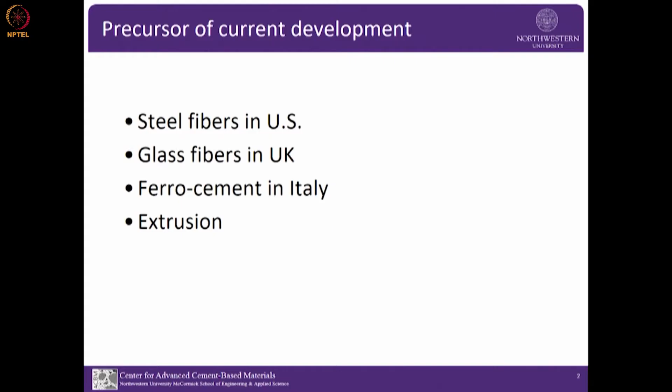Then ferrocement in Italy by the well-known architect and engineer Pier Luigi Nervi, which is a precursor of currently textile reinforcement, and extrusion, which can be considered a precursor for 3D printing.

Let me first start with the development of steel fibers in the US. The concept behind the development, according to Romualdi and Batson at Carnegie Mellon, is that concrete is a brittle material, and a brittle material obeys the Griffith fracture criteria, that is fracture strength is inversely proportional to flaw size. Smaller the flaw size, considerably higher fracture strength. So they said that if you use randomly distributed fibers, they can be closely spaced, so you can increase the tensile strength. A very intriguing idea.

When they published their paper, I was doing my PhD at Cornell, and I got quite interested because I had taken courses in fracture mechanics at Lehigh University. I looked at the paper, and it turns out to prove their concept, they tested reinforced concrete beams with wires, and they were under-reinforced, so as soon as the crack happened, the bar yielded. To get the same volume but closer spacing, they had to use thinner and thinner, smaller diameter wire. And smaller the diameter of the wire, higher the yield strength. So when I normalized the results with the yield strength, it turns out there was no effect of spacing.

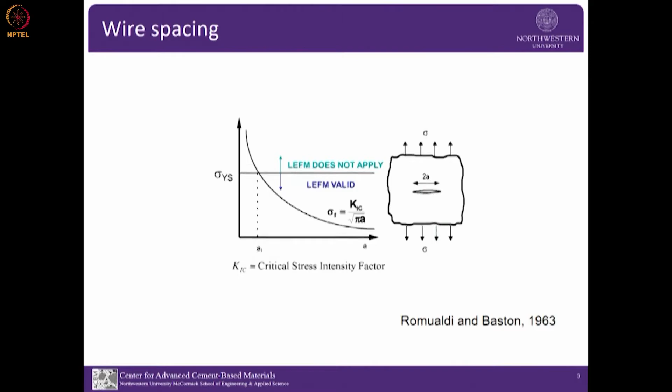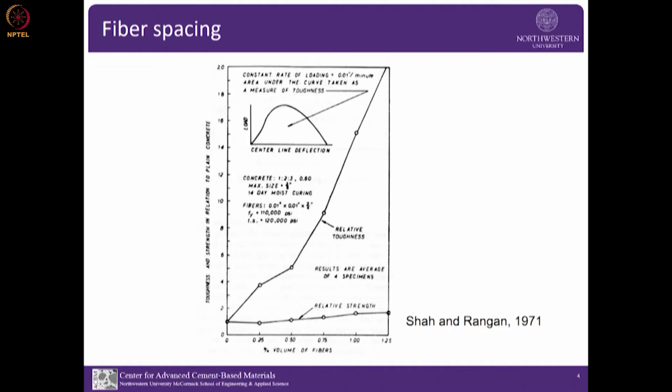Then we did some work with randomly distributed steel fibers. Here you can see percentage of fibers - more volume of fibers means they are more closely spaced - versus tensile strength, and what we call toughness, the area under the load deflection curve. This was work I did with Vijay Rangan, who is now retired from Perth. You look at it and see there is really no increase in tensile strength, but there is a substantial increase in toughness.

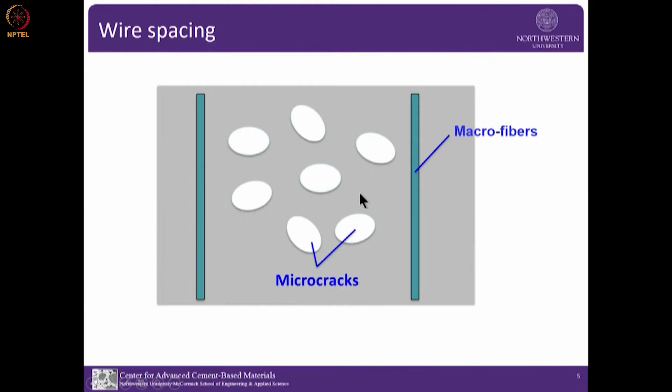Why is that? One reason there is no effect of spacing is that at the meso scale, the cracks start at the micro level. These fibers are macro fibers in the millimeter range, and we're talking about 1% or so. Before the fibers can interact with the crack, micro cracks have already coalesced into a macro crack, so tensile strength is already formed. Then the fibers constrain crack opening or crack width, and toughness. That is really the basic idea about currently used fiber reinforced concrete.

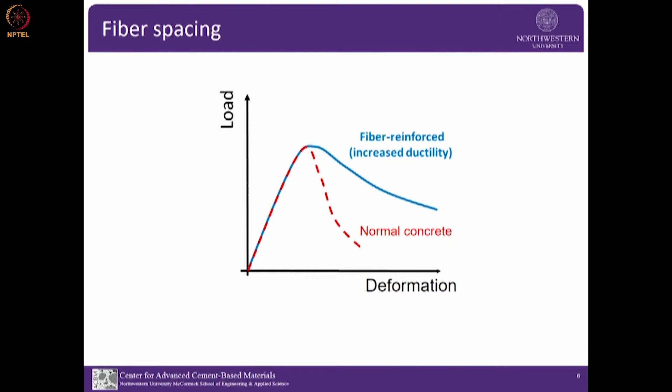If you look at fiber reinforced concrete, whether in tension or compression, load versus deformation, we know normal concrete in compression or tension is characterized by strain softening, very important especially in compression, and in tension. When we have fibers, at around one percent, it doesn't change the modulus, and generally does not change tensile strength, but it does change substantially the post-peak behavior. So crack control is the main reason we now use macro fibers, conventional fiber reinforced concrete.

The toughness becomes important, so how to measure fracture toughness? For linearly elastic fracture mechanics, there are ASTM tests. You have a notched beam, apply the flexural load, and when it reaches maximum, everything is elastic. From the peak load and crack depth, you can calculate fracture toughness. But a lot of work has been done, and it turns out concrete is not quite brittle, we call it quasi-brittle, so there's crack propagation before the peak - a so-called fracture process zone. So you cannot use LEFM.

A lot of work has been done, I think Professor Gettu has also been involved. Now people conclude the best way to get fracture toughness experimentally is with this notched beam test, testing crack mouth opening displacement. When you apply the load with a CMOD control rate, you get the entire load displacement curve, and from there you can calculate fracture toughness. This is really an accepted way - Italians have a code based on this test.

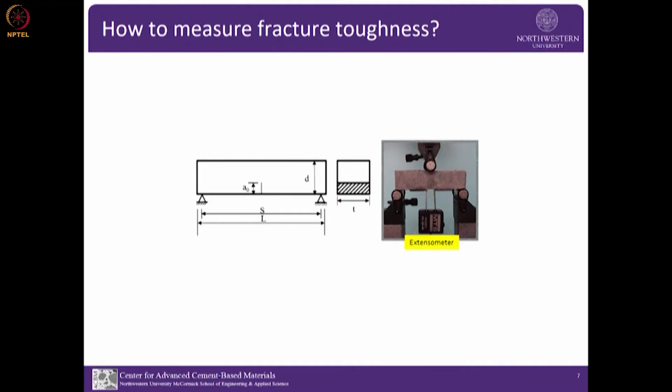Not too many people can have closed loop testing. I know IIT Madras has it, but many people don't. So you need a method which is somewhat easier to conduct than the CMOD control. So we developed this so-called ring test.

In a ring test, you have a concrete here, and there is a steel ring which is relatively rigid. After curing, you put concrete into drying. Concrete wants to shrink, steel says no, so you develop tensile stress. And because of axisymmetry, it's like an infinitely long tensile specimen. So you find out when the crack starts, and then using a microscope how wide the cracks are.

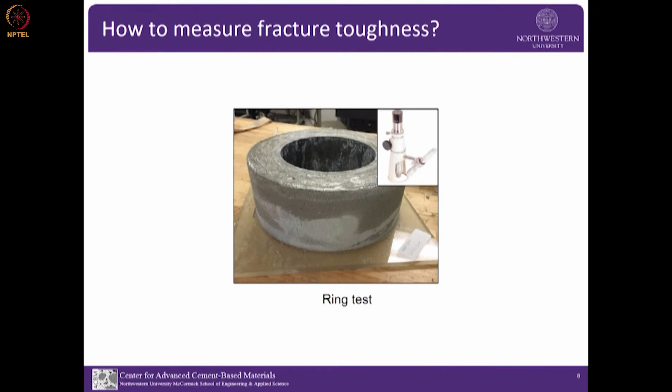This test has now been standardized by both ASTM as well as highway departments in the US. It's a good way to evaluate the crack potential of a material, and to evaluate different types of fibers. For example, we showed that when you make a high strength concrete and compare it with normal strength, high strength has a higher tensile strength, but because it's more brittle, it cracks earlier than normal concrete. So this is a very good test.

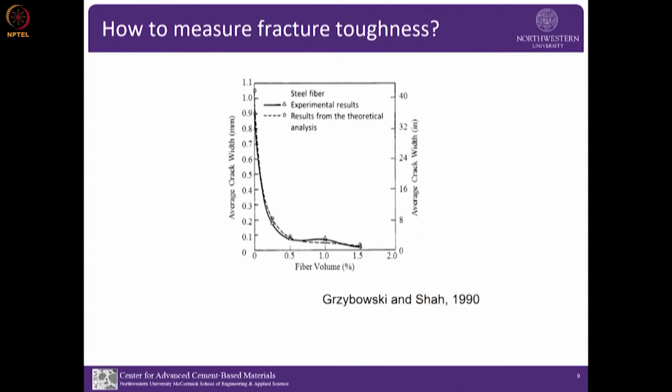Now, when you cast concrete, those of you who have done experiments know that if you increase the volume of fiber, workability is an issue. If you increase the length of fibers, workability is an issue. So this is one of the reasons why with cast concrete, most applications of fiber reinforced concrete use about 1% fiber volume, and aspect ratio not too much larger than 100.

So people are looking at alternate methods of production other than cast in place. One of them is the so-called Hatschek process, which was developed in Austria, and it's widely used for cement board. Cement board starts as a very dilute slurry originally with asbestos fiber, and then layer by layer it's deposited. This is in fact the first example of so-called additive manufacturing, because you have layer by layer manufacturing and you get cement board.

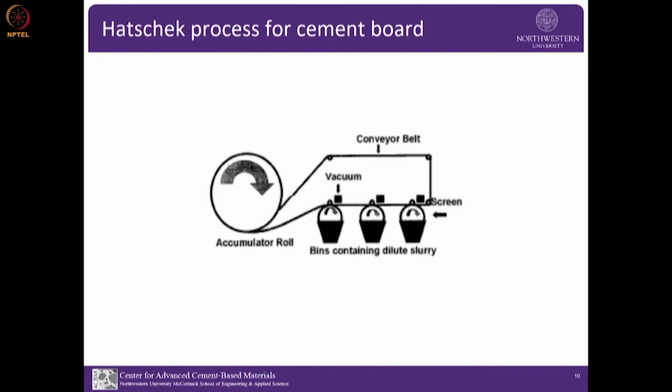It turns out that asbestos could cause lung cancer, called asbestosis. So many countries have banned it, and people have been looking for alternatives. In England, they came up with the alternative of glass fibers instead of asbestos fibers. The pioneering work was done by Majumdar at the Building Research Establishment in England.

Now, when we use normal glass, there are issues with the alkali reaction of E-glass. So they developed alkali resistant glass fibers by adding zirconia. It turns out that in these applications, glass fiber really did not work with this processing. So now for the Hatschek process, people are using cellulose fibers instead of asbestos for green strength, and then for reinforcing either PVA or polypropylene.

But chopped glass fiber spraying, simultaneously spraying with a slurry of cement and glass fiber, has become quite popular, and it's called GFRC, glass fiber reinforced concrete. Let me show you some work we did with GFRC.

When the alkali resistant glass fiber was developed, to test that it doesn't corrode in high pH, they do a test with a glass strand surrounded by high calcium hydroxide solution, and then measure it to see whether the tensile strength holds with this accelerated test. It's called SIC, and they showed that alkali resistant glass fiber performs very well in this test.

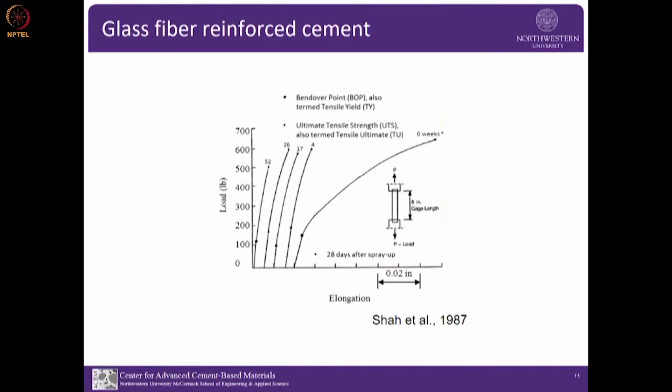I talked with one of you working on textile, and I mentioned that he must also test the composite to see whether you have durable results. It's different with a continuous fiber rather than chopped, because when the chopped fiber is inclined, they can break. So you might have a different mechanism with that.

So that's one way. There are two alternates then cast in place that I mentioned. One was the Hatschek process, and the second was GFRC, where you spray glass fiber and cement, and both would allow longer fibers and higher volume, so you can get this strain hardening response.

Well, third way is extrusion, and I talk about extrusion because it is a precursor to 3D printing. We developed this in 1997. So this is a screw type extrusion.

You have fiber reinforcement, material looks like a dough, and you push it through a die, depending upon the shape of the die. The fibers we used here are microfibers, PVA fibers, 14 micron in diameter, and rather short, 2 millimeter long. You can see that we got 2% and 4%.

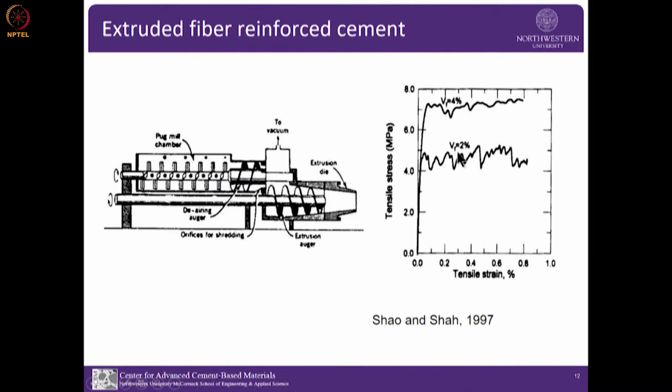We got a higher tensile strength because fibers can now interact with micro cracks. And if you design it right, you get a strain hardening response, because it's essentially like a ductile material. I often showed this to my class during that time.

Most, as I said, my macrofiber is still the most commonly used commercially, but people have been working with this so-called strain hardening cement composite.

Here is, for example, one of the things we did, which is a 10 megapascal strain hardening response.

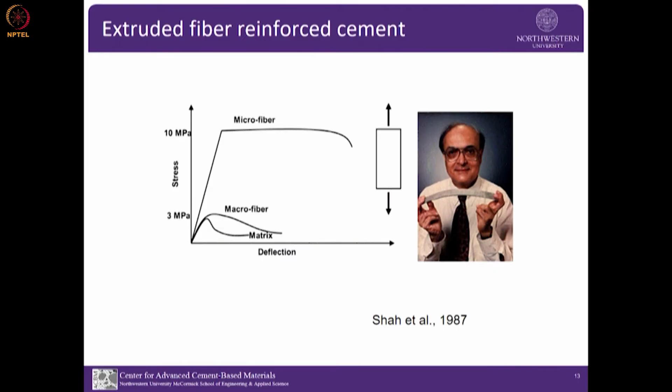Now, what we found out, if you recall, I told you that the effect of closer spacing did not work with the macro fiber, but with the small fibers we have now.

So what we did: all the material had the same volume of PVA fibers, but because of dispersion and other reasons, we got different results.

So we cut the specimen and, using SEM, calculated what is the fiber free area, and assumed the fiber free area is the flaw size.

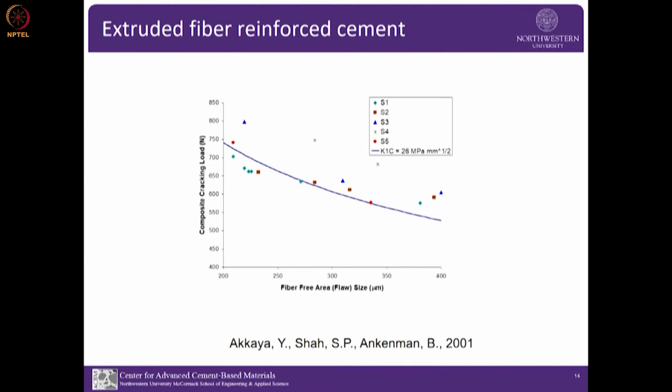So here we calculated the fracture composite versus fiber flaw size, and we did get something similar to the Griffith fracture criteria. But the flaw size has to be in a small enough range, and the fibers have to be in the size range that they can interact with the cracks.

With extruded cement, I showed you this: depending upon the die you can manufacture sheets, and as a matter of fact, so-called cement board with different fibers has been extruded in Japan.

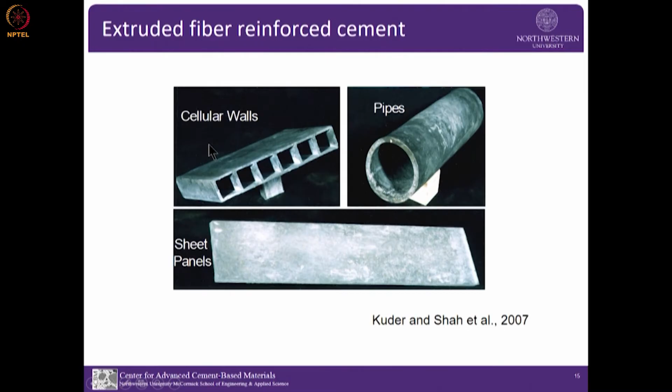You can even extrude pipes or cellular wall sections. To show you how light these can be, many of you might know Alva Peled.

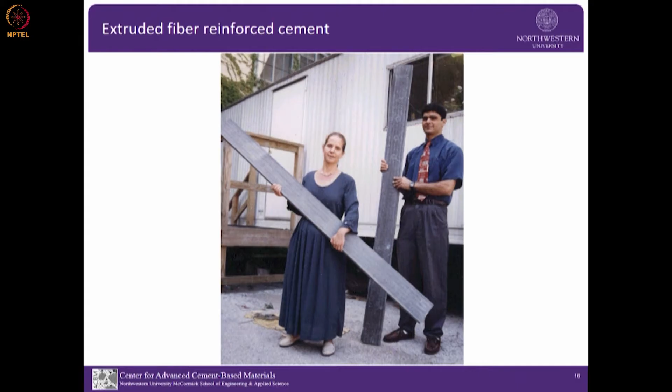She is a professor now in Israel, but she was a postdoc with me. This is almost a 2 meter tall cellular section, and it's light enough that Alva can lift it. And Ilmaz, who is now a professor in Istanbul.

So then there are other ways to manufacture, and Alva, and Barzin Mobasher at Arizona State, are using pultrusion. Now pultrusion is quite common for resin and epoxy type composites, but this is the first time with cement. You have a continuous strand that goes through the cement slurry, and then you develop the composite.

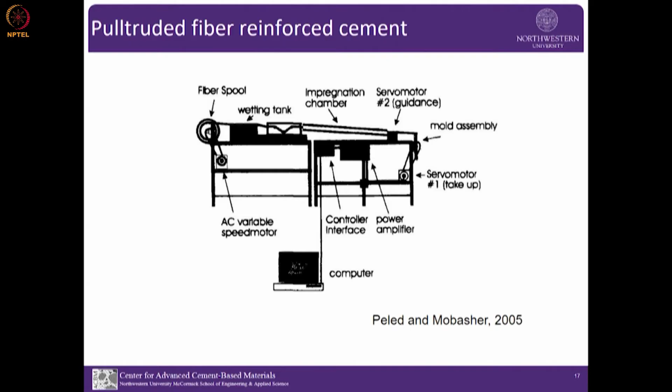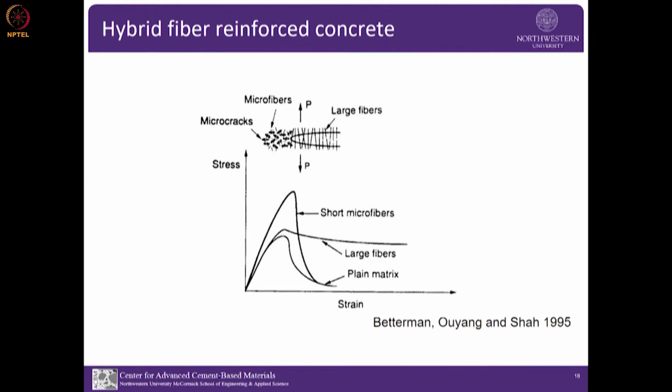Okay, so another thing people have studied quite a bit is the so-called hybrid composite. In the hybrid composite, we know that short fiber can increase the fracture strength, but they are short. So once the crack develops, they don't have as much long range crack controlling property. Large fiber can do it, but they don't really increase the tensile strength.

So you can combine the two and produce results which have a very, very fine crack width and also post-peak ductility. To show you an example of this, we did a test. These were mortar specimens reinforced with fibers and subjected to tension. So there will be cracks.

We wanted to see what the flow property is, because most of the time when you use fiber as a layer, you want it to be protective of rebar, so you want to make it as impermeable as possible. If you use big fibers, they will control cracks, but the cracks will be wider. Finer fibers give much finer cracks.

It also works with the mechanical properties. Here is the stress displacement of plain mortar, and here is 0.5% of steel macro fiber, which doesn't really change much except post peak. Now this is 0.5% of micro steel fibers - we asked Bekaert to make for us just the microfiber, about 30 microns in diameter.

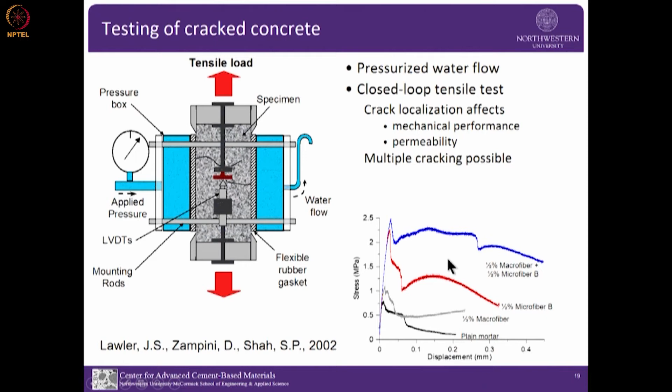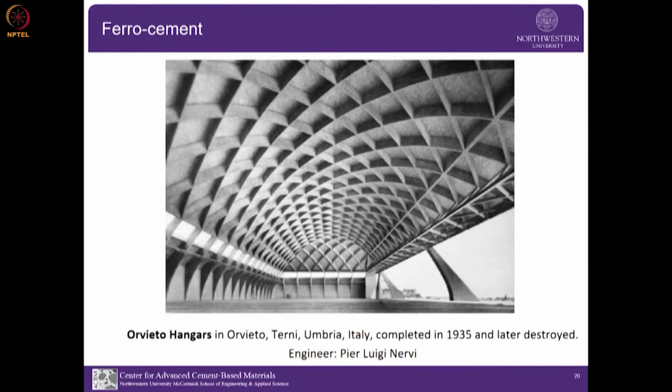Later on, I was a visiting professor at MIT, and Tony Naaman started his graduate work. I was in the materials group, and Tony wanted to do something with reinforced concrete. So we said, okay, let's look at ferrocement and give some engineering quantitative reason why cracks are so fine in ferrocement.

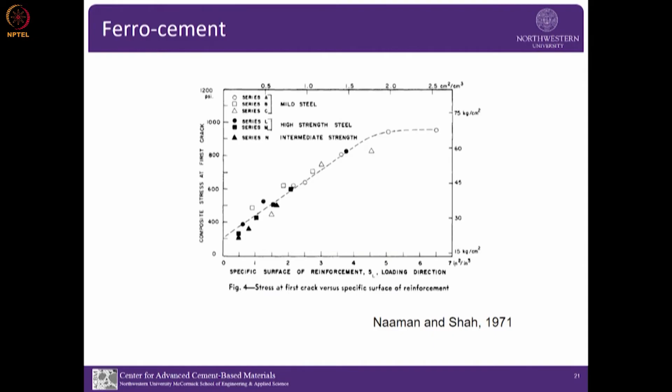This was a paper we published in '71, plotting composite stress versus surface area per unit volume - higher surface area means higher bond, and you get excellent increase in first crack strength, which is important, and you also decrease crack width. We showed average crack spacing versus specific surface of reinforcement - more surface area gives more multiple cracks for the same displacement, and obviously finer cracks. That is the basis of ferrocement.

Now, instead of steel wire, people have been using glass fiber cloth, synthetic fiber cloth, as well as carbon fiber. Quite a bit of work has been done in Germany with textile reinforced with glass fiber. The basic idea is that with textile you can have multiple cracking, strain hardening response, and bond becomes a key point.

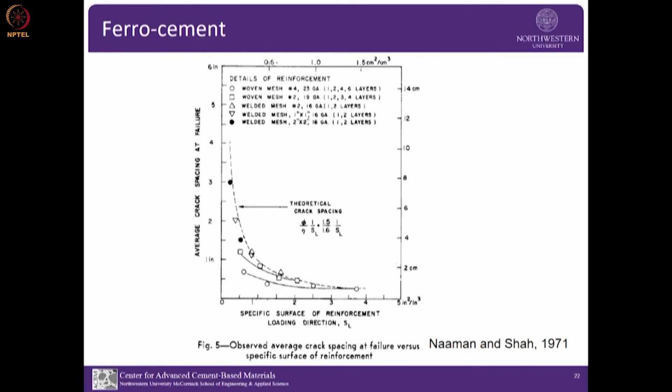Even now with textile, say with carbon fiber, bond is an issue. With glass fiber, bond can be an issue because of the coating. As I found out at a conference in Dresden, people have been working on how to improve the bond with surface area. One idea I mentioned was whether dipping the glass fiber cloth in a slurry of nanosilica would help improve the bond, since nanosilica might help, but with the coating I'm not sure - there are many ways to approach it.

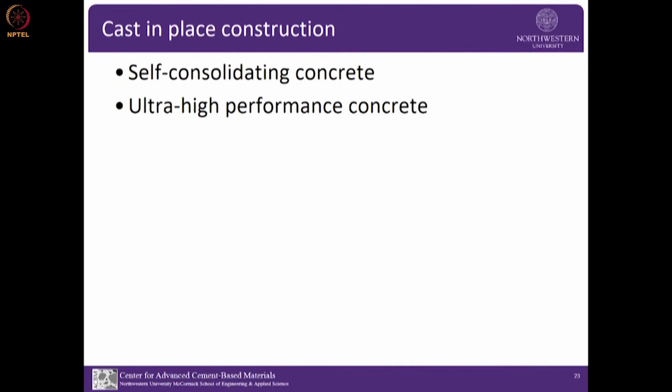With the development of self-consolidating concrete, we can use longer fibers and higher volume, because the material flows like water. This has changed previous thinking that we couldn't add more than 0.5% or 1%. Now we can add higher volumes of longer fibers, which has led to what we call ultra-high performance concrete. UHPC has no coarse aggregate, primarily silica sand, and compressive strength can be as high as 200 megapascals. In fact, ACI, the American Concrete Institute, defines UHPC as minimum 150 megapascals with sufficient ductility - this is very important, because ultra-high performance concrete would be very brittle, almost like glass, without fibers. So as a result of fiber reinforced concrete and HPFRCC development, we now have UHPC.

I just want to show some very recent work I was involved with at Hong Kong Polytechnic, where we used high density polyethylene fiber - higher modulus, longer length, and finer diameter. The interesting thing is that the strain here is 8%.

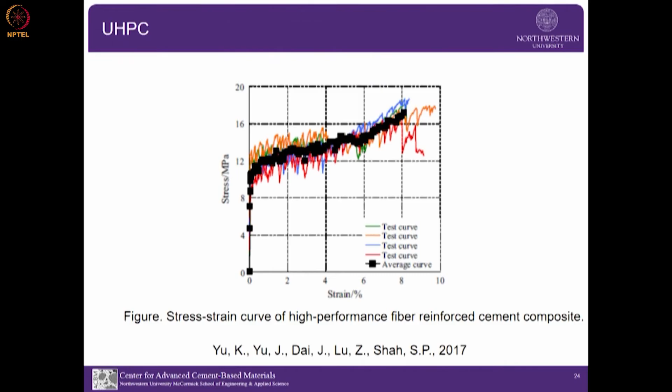You don't expect multiple cracking to have such a high peak tensile strength - as much as 16 megapascal. So because now we can control rheology, we can add fibers, these are 2% volume of the fibers, and I thought it would be interesting, so we put that in the paper.

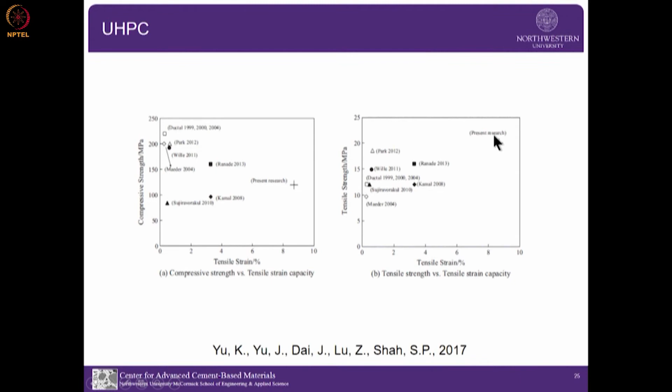Here I've shown UHPC compressive strength versus tensile strain, because we want high compressive strength and high ductility. In our work, we weren't able to obtain 150 but more like 120 megapascal, with considerably higher strain. Looking at tensile strength versus tensile strain in tension, this is considerably higher compared to what's been done before. So now with the development of rheology and fibers, we can produce strain hardening composites with relatively large strain and high compressive strength.

So this is where we are with microfibers and macrofibers. We have conventional fiber reinforced concrete, with a lot of work being done on what happens in cracked concrete over time under creep. And UHPC, very high strength concrete up to 200 megapascal with 3 to 4% fibers - for example, Lafarge has developed a product called Ductal, same idea, and UHPC is now being used in many applications.

But conventional reinforced concrete, with reinforcing bar or pre-stressing, helps structural ductility. After the crack forms, reinforcing takes over and we get substantially higher load and ductility. With fibers, the main emphasis is crack control, and with UHPC in some very thin, very high strength applications, you may not need conventional reinforcement.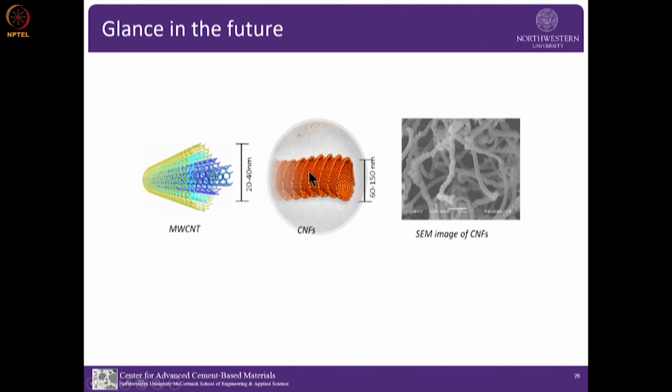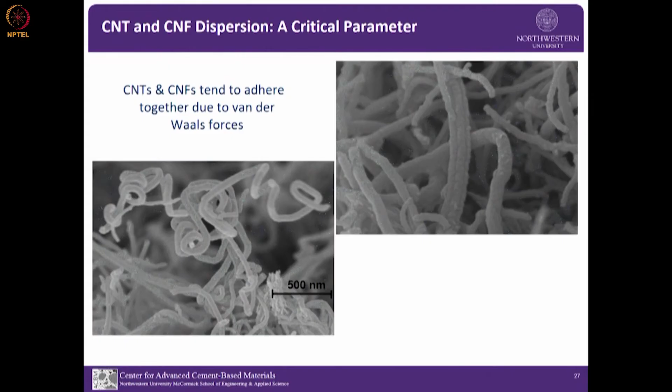So I want to show you some results of well dispersed carbon nanotube. We've also been using carbon nanofiber, which is somewhat coarser, and the way they're made, we think the bond could be somewhat better, though we haven't checked it. Here's an example of what happens if they're not well dispersed - the fibers conglomerate - versus well dispersed, where we have individual, in this case multi-wall, carbon nanotubes. This is SEM imaging, and there's really not a very good way to find dispersion of carbon nanotube in hardened material, because at nanoscale you don't see them well in SEM.

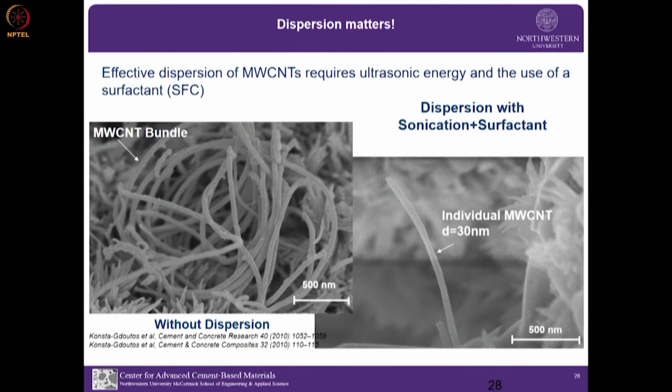In an aqueous solution you can check dispersion with UV spectroscopy. The idea with carbon nanotube reinforcement isn't like conventional reinforcement - you have an aqueous solution where, in the factory, you apply ultrasonication and surfactant, and then use that similar to a superplasticizer. So that's a different way of processing.

I want to show you some results with carbon nanotubes. These are fracture tests on mortar specimens with water to cement ratio 0.5, at 0.1% dosage. With carbon nanofiber, for example, we've substantially improved - almost doubled - the fracture strength, while also maintaining a very good post-peak response.

Now we know that carbon nanotube at 0.1% is well dispersed, and we say, why is it working so well at such a small amount? At that time we had our MIP, but Northwestern was saying we cannot use it because one of the students had spilled some mercury, so we couldn't measure it. So we said, what else, what property can be substantially different because of change in nanopore?

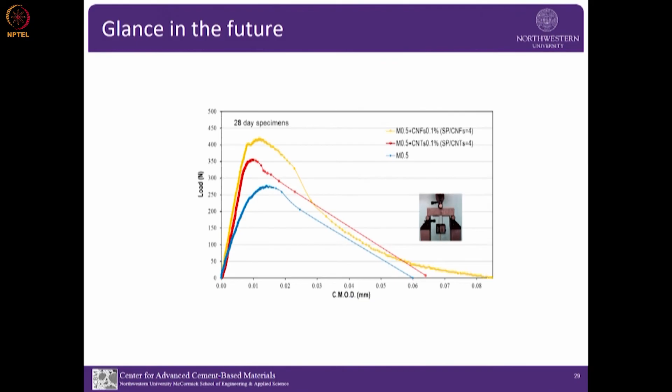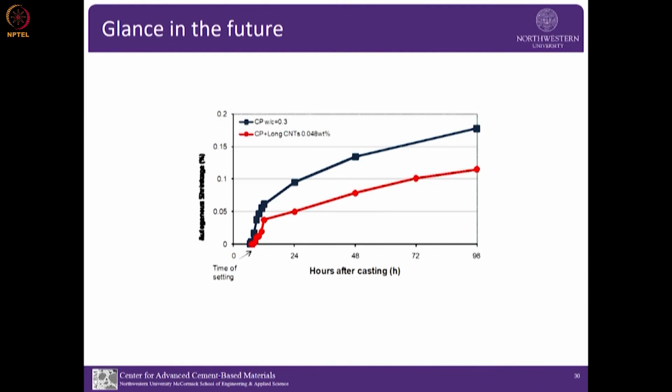So we measured autogenous shrinkage, and we found a substantial difference. This is water to cement ratio 0.3, measured after time of setting. This is the plain cement paste, and this is with a very small amount, 0.048%, showing substantial reduction in autogenous shrinkage. We are still trying to understand why this is so.

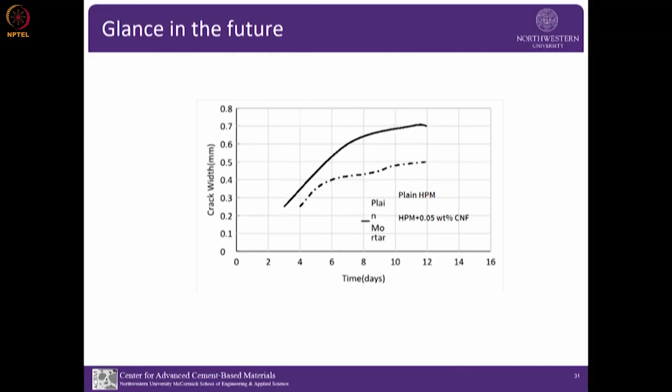Then we used this ring test and autogenous shrinkage, measured the shrinkage when the crack starts and how wide they are. This is the plain mortar, and this one with 0.05% carbon nanofiber. The crack starts later in the ring, and once it starts, it has a lower crack width. So this combines, in a way, the advantage of both fibers and shrinkage reducing admixture, because we have reduced shrinkage and reduced crack width.

Many people have been talking about so-called smart material. You take advantage of the piezoresistive property of adding carbon nanotube. Piezoresistive means you apply stress and the resistance changes proportionately and repeatably, like a sensor.

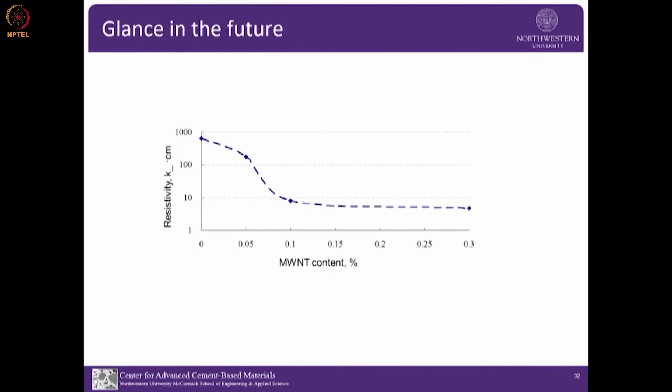So we did some work where we measure the resistivity. This work was done at Hohai University in Nanjing, with multi-wall carbon nanotube, looking at resistivity without any addition. You can see at 0.1% conductivity has changed by two orders of magnitude, and resistance has gone down. So that's very effective for using this material as a sensor.

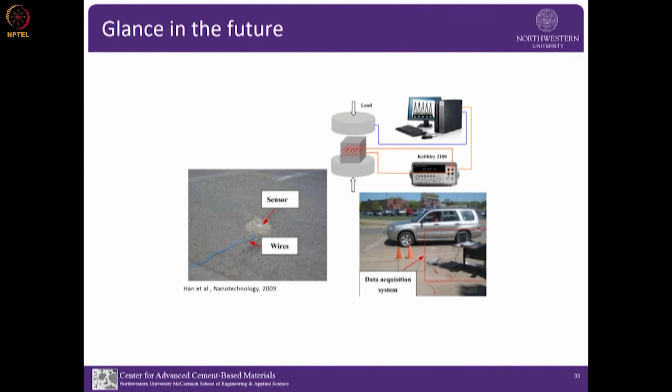Many people have done work on this. This is not our work, but somebody in a highway department in Minnesota used cement with 0.1% carbon nanotube, applied compressive load repeatedly, and remotely measured and calibrated the change in resistance. When you embed this as a sensor, when a car goes through, you see the change in resistance, and with a second car, you can measure, for example, the speed of the car remotely. There are many other ways people can use this as a sensor. So that's another property of carbon nanotube.

Then I want to conclude with some very interesting direction. Last year, about January, there's a big ready-mix company, I think called Prairie, which before was Material Service, and now it's one of the largest. They called a workshop, and they said that the tall building designers are asking them to double the modulus of concrete. We're talking about 55 gigapascal.

There were people from material suppliers, ready-mix, contractors, and they said currently, to satisfy the requirement of modulus, they are increasing compressive strength. Instead of, let's say, being happy with 100 for a tall building, they are using 140 just because of the modulus. And that's more cement, not sustainable, and also the material is more brittle.

After that, I realized that most of our work was on cement and carbon nanotube, because we are talking about nanoscale, but we had seen an increase in modulus. So we said, let's see whether we can increase it also - what is the increase when you have mortar, sand, and aggregate? Now you realize if you have aggregate, carbon nanotube is not doing anything to the aggregate, so the proportional increase in modulus would be less. Well, we did this.

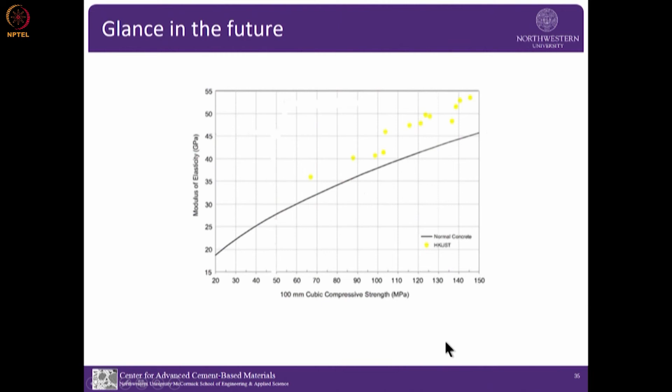You cannot model this with a composite material approach. Same thing more or less with concrete, and I will show you why. So we thought this is quite interesting.

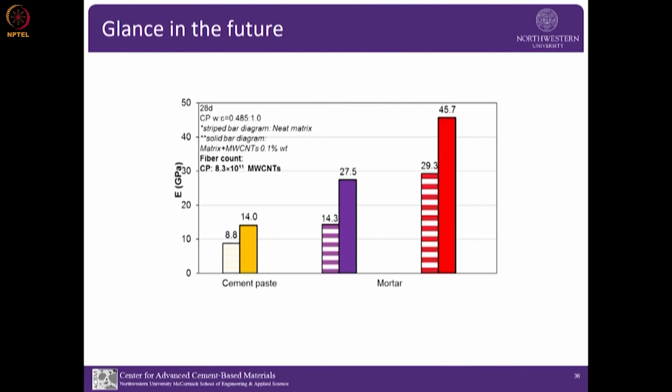Recently we published this in Concrete International - uncoupling modulus from compressive strength. So the designers seem to be quite interested in this, and we will see.

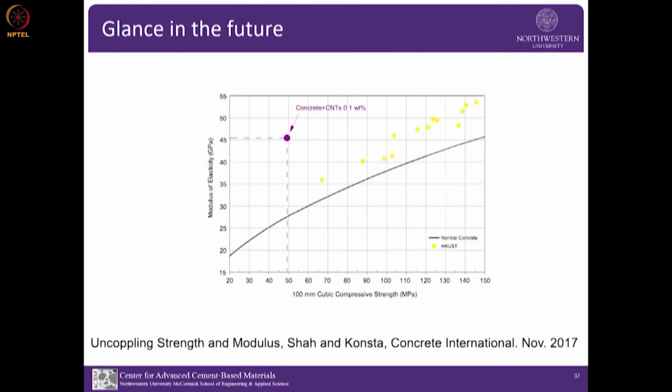Of course, the challenge is we have only done this in the lab, and to do it for concrete at large scale - even though it's only 0.1% - you need a larger facility to ultrasonicate, so scaling up is always a big problem. We will see how it goes, but I thought this is very interesting.

So now, why does a small amount of carbon nanotube increase the modulus? First let's look at cement paste. For cement paste, we did nano indentation - some of you are familiar with it. You measure at the nano scale using indentation, and from load deflection, unloading and loading, and using contact mechanics, you calculate the modulus of the nanophase.

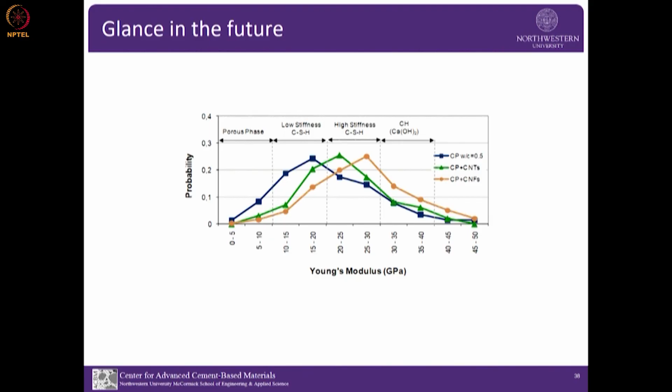This is essentially the modulus of CSH. This is cement paste with water to cement ratio 0.5, and this is cement paste with carbon nanofiber. You can see that we have moved the CSH modulus to the right - carbon nanotube has improved the stiffness of calcium silicate hydrate. This is one of the reasons why, even with a small amount, 0.1% of carbon nanotube, you see the increase in the modulus of the composite.

To see what is happening with the aggregate, we decided to measure the modulus at the nanoscale of the interface. Now, the interface is 10 to 15 micron, so you cannot use conventional nano indentation because the indent itself is a few microns. So we use an atomic force microscopy needle applied in cyclic loading - you measure resonance frequency, dynamic frequency, and the force is very small, and the spacing is much smaller than with conventional methods.

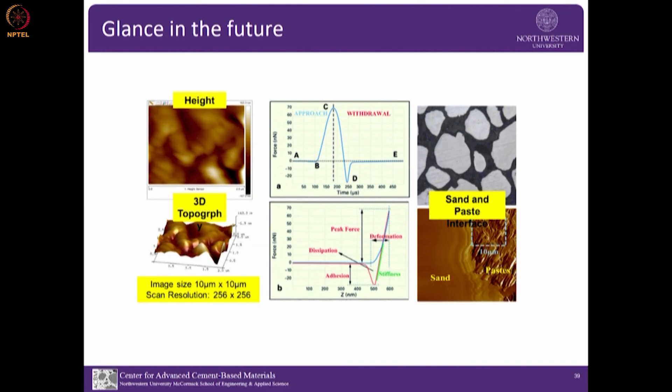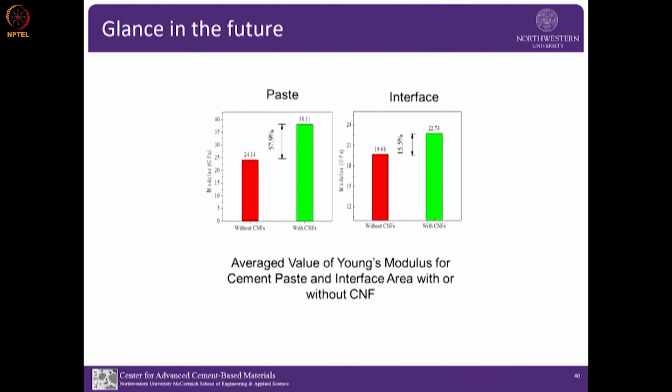So doing this, I want to show some average values - of course there is a histogram. This is the average increase with addition of carbon nanofiber of cement paste and interface. One reason mortar and concrete were proportionately more effective is that the interface modulus increases - you not only increase the paste but also the interface. But we have to realize that silica fume also densifies the interface; however, silica fume increases compressive strength and makes the material more brittle. Here we don't really increase compressive strength much, and as I showed you before, the material is not more brittle.

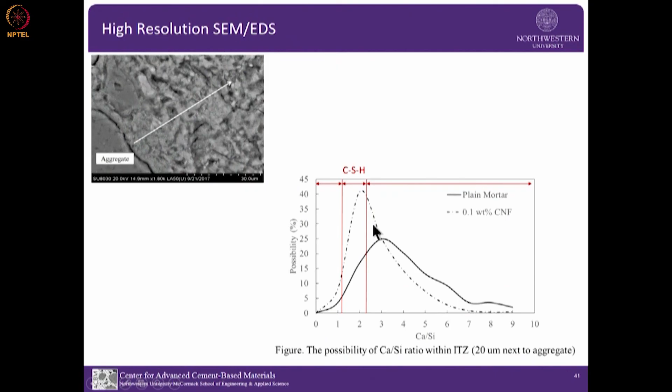Another interesting thing we found - this is work done by Yuan Gao, the current PhD student - using SEM and EDS, she took several lines and measured the calcium to silica ratio. These are average results, and what we found is that at the interface, the calcium to silica ratio is lower when we have carbon nanofiber. We know the lower the calcium to silica ratio, the higher the modulus of CSH. I don't quite understand it - I presented this at one of the conferences when Karen was there, and she said she thinks the carbon nanotube may influence the crystallization of CSH. That may be the reason, but we don't know, we are just looking.

It's very interesting that carbon nanotube also changes the morphology of calcium silicate hydrate. So that's really modification at the nanoscale - that's a good direction to pursue.

So just to summarize, what do we want in high performance fiber reinforced concrete? Well, I think we want enhanced modulus of elasticity - clearly that's very useful in tall building design. We want what I call a higher bend-over point, that is a higher elastic limit, so we want noticeable cracking to start as late as possible.

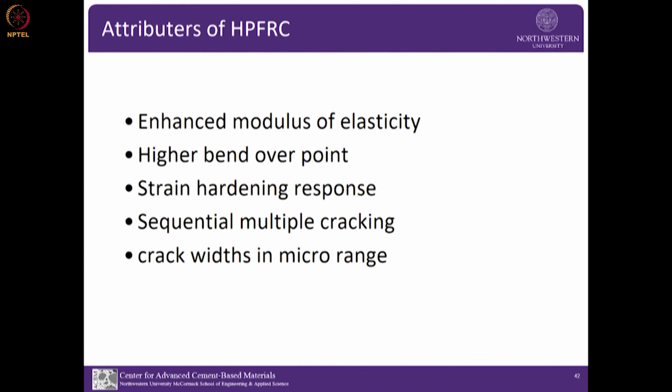Very important, we want a strain hardening response, and during strain hardening we want sequential multiple cracking - first crack, second crack, and so on. During this sequential multiple cracking, cracks don't open because there is no noticeable debonding at the interface. Only after crack saturation does the crack width increase. So that's important - in many applications you want crack width in the micron range. We and others have shown that for cover concrete, say 2-inch or 50 millimeter thick, cracks of 50 micron or less make the material impermeable. So that's one way to control it.

So I hope I have given you some idea about the current development and the precursors - how we got there. It's very important for us to know. So that's my last slide. Thank you.